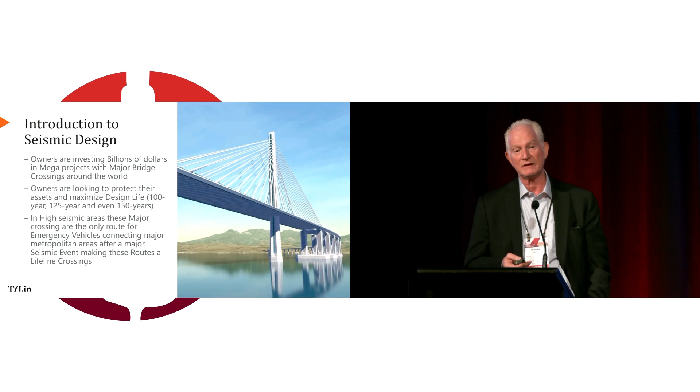So the first thing related to this particular conference is obviously the seismic hazards and the ground motions. And any big structure, you're not just dealing with seismic. You all know that, right? We saw what happened with the Key Bridge in the US when a vessel hit it and collapsed it very quickly. And any one of us in this room would have probably been able to predict that. We actually look at that pier and say it's a matchstick standing in front of a big barge. There's no way that it is going to be okay. In fact, as we speak, the NTSB in the US published a report, and we have about 17 or 18 of our mega bridges, including Golden Gate Bridge, including Brooklyn Bridge, that are actually susceptible to vessel collision, and we are looking into reinforcing those and making sure they're protected for that.

So vessel collision is one. The other one is wind. We all know about wind. We've seen some structures collapse in the past, but again, it is one of the major elements. Tsunamis is a third one. And obviously, seismic hazard, which causes tsunamis, is the subject of this topic, and it's probably the most wild one of all of them because not really a lot of probability goes into it.

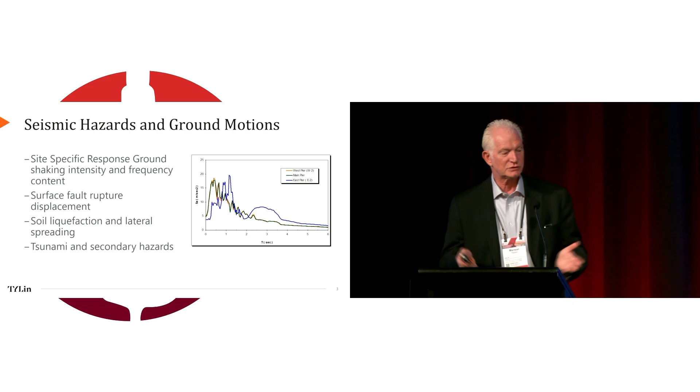So the first thing you do is you try to get your hands on what is the seismic hazard. What does that mean? It's very well represented in a response spectrum. Where is your energy in, at what frequency? It's very easy to shake a table. Are you shaking it very fast or are you shaking it slowly? Those are things that matter.

And then two, what is the soil underneath that? Is it sitting on rock, or is it sitting in a bowl of jello that shakes, or is it going to liquefy? Those are things that are major, major drivers.

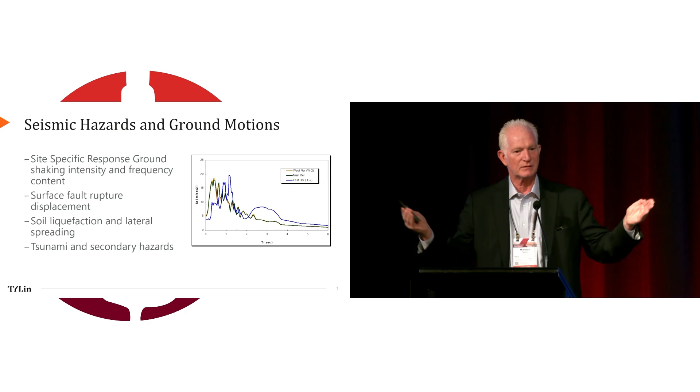The most important piece of it all is when you're dealing with a long span structure, you could be shaking like this on one pier and like that on another pier. And that's why most of our bridges collapse. That's why what happened in Myanmar, some of those projects, when you look at them, the multiple spans, you saw some trusses fall down, the others didn't. That's because simply the displacement exceeded the bearing displacement, and it fell over. The structure would have been perfectly fine if the engineer just had a little extra, probably. Yes, it probably would have got damaged, but potentially not collapsed into the water.

So what we do is we look at performance-based seismic design. What we are doing is we are looking at what is it that we want out of our structure. Are we looking for our structure to not collapse? Are we looking at our structure to save lives? Are we looking at our structure to have the ability to have emergency traffic on it? In other words, is it what we are referring to these days as a lifeline structure?

Is it a route that is very important, that after a major earthquake, when your fires are out, your buildings are down, and you need your emergency personnel to travel from one point to another, this is your lifeline structure. That's the structure you want to stay there. So therefore, it has a higher standard of performance. Those are different levels of performance, and they actually drive a lot of the discussions.

What's interesting, I've been in many conferences where people start talking about, oh, what's your maximum credible earthquake? Are you designing for the maximum credible earthquake? Or what is your return period? Is it 2,500 versus 1,500? Oh my God, you're designing for 1,500, therefore your bridge is no good. It's absolute nonsense. What matters is what are you designing and how are you going about it?

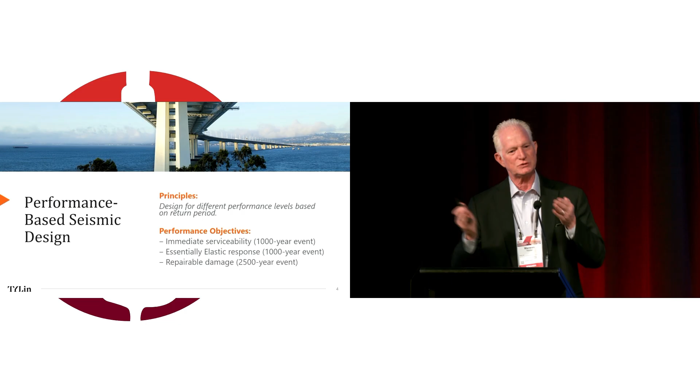Are you doing pushovers after that? What happens when the loads do exceed those demands? And is the structure going to be okay? So looking at it from a macro picture about performance-based design and the levels that you're designing for is really where the rubber hits the road.

So when we look at the design, the performance-based, and once we get there, now we look at what does it mean to have a capacity-based design philosophy? It's simple. We all drive our cars. We all know that we get into an accident. It's inevitable. It's what's going to happen.

So what you do is you design for fenders to take most of the damage. And then you design for a seat belt, obviously, to hold the driver. You have the airbag. But bottom line, you're planning for this to happen and making sure that the car system at the end of it is not going to basically break apart at the axles itself.

You're trying to have a sequential way of damaging things. And in earthquake engineering, if you actually work with a capacity-based design method, you have these weak links, you might call them fuses, like the fuse box in your house, when an electric jolt comes in and it burns up rather than having you replace your refrigerator. Those elements become the key components of you being able to design. It could be a plastic hinge design that you have. But most importantly, you have to ask yourself, what if things do change? What does that mean? And more important after that is, if they do form a hinge, can you repair it? Can you inspect it?

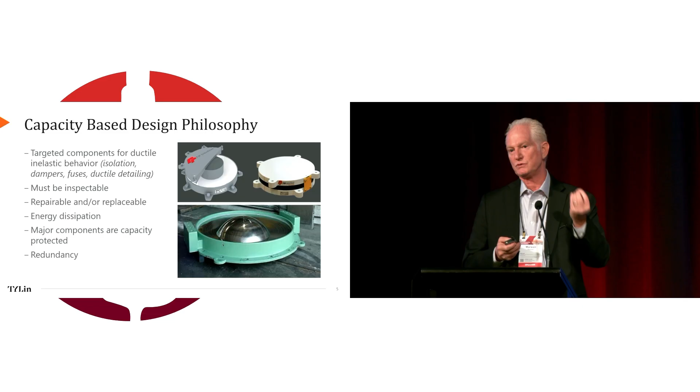Can you look for what happens next so that you are in a position where you can have the performance-based design that you're looking for? So in seismic engineering, that's the capacity design. The second is really to use our technology today to actually be able to capture the demands.

Now we've established the seismic hazard, we've designed our capacity design philosophy. How do we go about establishing the actual demands? That's not a straightforward process. However, I think a lot of us in this room would say we know how to do this. Problem is, it's too dangerous of a tool in the hands of young kids that run these analyses, and guess what? They look damn impressive.

And when you have them, you will believe them, and therefore you'll design for them. But the key is to actually always go back to the basics. The structures are rather simple. You don't want to overcomplicate it, and when you think about it, you can probably, within a month or two, figure out what the demands are.

So as I always say it, you can go and run the analysis all you want. What matters to me at the end of it is you can show me your force diagram and the force flow, and convince me that you've got the right displacements. And we look back at the response spectra, we can draw the displacement spectra and find out what the maximum displacement is so that your structure is designed for that maximum displacement.

I don't care if your time history says you're gonna be displacing about half a meter. What matters to me, if your displacement spectra at that period you have says you're gonna reach 0.75, you'd better design for 0.75. It's very simple. Your ground motion content, the time history, happens to be such that it's seeded, that it doesn't have that, it's not doing its job to make that displacement be at 0.75.

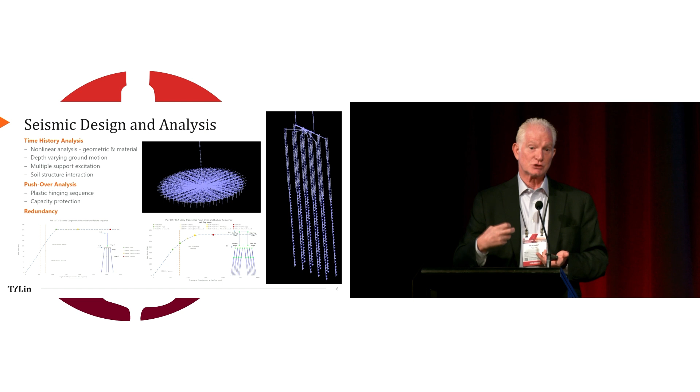But what you see in this image here is you see the whole piling system, and you see all the PY and TZ springs, and you see the nonlinear behavior of those elements. And that allows you to not only get the actual ground motions that's seeded from the bedrock, but do the depth varying motions and the multiple support excitation that I talked about, when one pier is shaken that way and the other one is shaken that way. You do that, you get a lot better sense of the complex nature of how the structure is going to perform during an earthquake.

So I am going to walk you through two projects that are dear to my heart. One of them was something that I started in the early 2000s and opened to traffic in 2013. I'll tell you, I have another story at the bar if you want as to why it took that long, but it's not by engineering, I can tell you that. A lot of politics involved.

But the key is that it started in 2000, and at that time, the whole concept of what I just talked to you about was just coming into the actual practice world that we had. There was a lot of research being done at UC Berkeley, a lot of research done at UC San Diego, in New Zealand here, across the world, learning from lessons as well, but it wasn't really taking into the actual application of building and designing bridges.

The concept of putting a damper on a bridge, or a viscous damper, or an isolation piece, base isolation, or putting a fuse was something that owners didn't want to deal with. So there was a lot of brain power that got involved in this. If I start the list of telling you the people that were involved, I wouldn't finish today. There was about 30 scholars that were all involved in performance of this bridge that you see there.

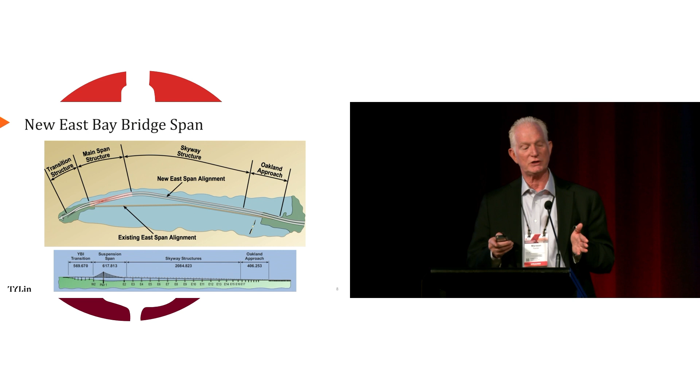So the bridge itself is about 3 kilometers long, has a signature span, which is the self-anchored suspension bridge, and has a viaduct for the other 2 kilometers.

It sits right between the Hayward Fault and the San Andreas Fault. The San Andreas Fault, for those of us who like the history of earthquakes, the 1906 earthquake in San Francisco destroyed the city practically. It was about an 8.1 magnitude earthquake, and if you look at how close it is to the city, running across the Pacific north-south, it is dangerously close to the near-fault effects.

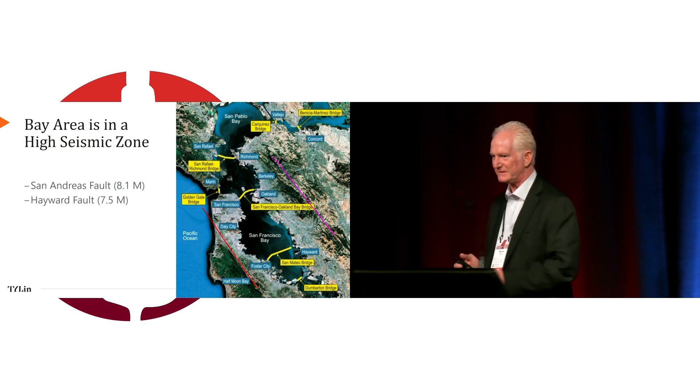I still remember as a student when Professor Bertero grabbed the table in the room and said, you know what an earthquake near the fault does versus not? If it's far away, it shakes the table back and forth like that, but if it's next to you, it takes that table and barges it. He said, that's what a near-fault earthquake does. That's exactly what it does—it actually shoves you to the left or to the right, and that's what collapses bridges.

Those kinds of earthquakes are going to occur in that Bay Area, and that's a metropolis. To make it worse, Hayward is right next to it in the hills over there. So we're sandwiched between two active faults—that definitely talks about hazard and seismic hazard. It is there, and the soil profile is terrible over there.

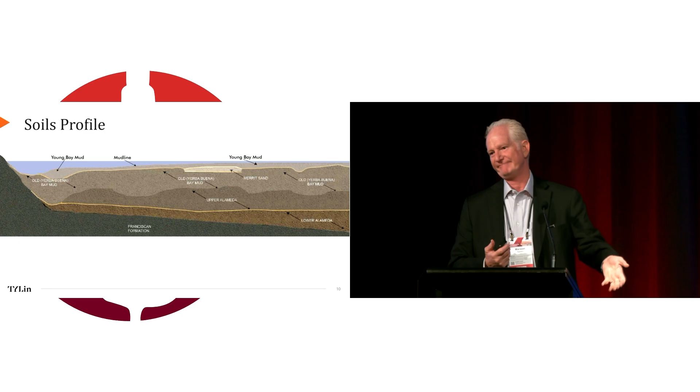A 100 meter deep bowl of jello—Bay mud, it has a name for it. When we were driving these large diameter piles into the soil to reach the rock, 100 meters deep, because that's what we needed to do, the piles for the first 30 meters sunk by themselves. You did not really need to drive them down. So the first 30 meters is just passive and doing nothing for you on these soils.

At that time, we worked with Fugro, who was the leading edge in marine geotechnical investigations. They did a 3-dimensional survey of the whole bridge, geophysical, with boreholes, and we understood the whole soil profile underneath it. In fact, the alignment of the bridge itself was chosen so that it is not as north as it should be, because they wanted sweeping views of San Francisco as you're driving towards it, and because we were afraid we'd reach an area with actual soil instability.

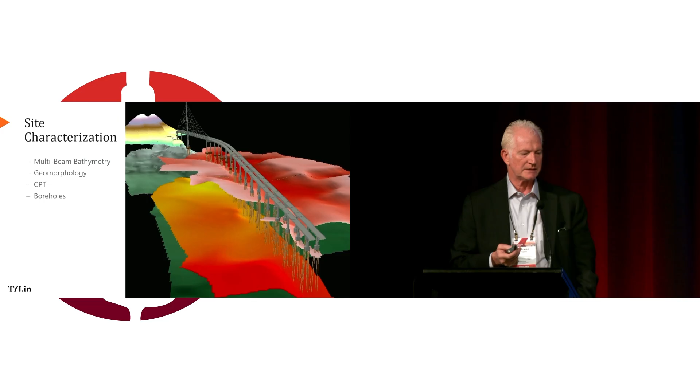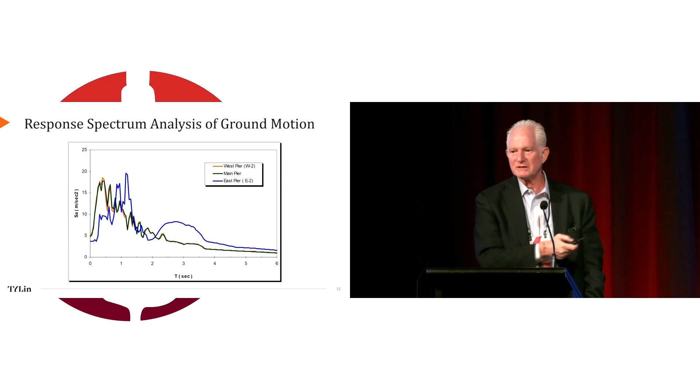Now, the seismic performance criteria—one of the things that happened, which was very interesting, is that back then, most design codes, AASHTO, any code you design for, the design life of a structure is 75 years. That sounds odd, right? You put something out and tell the owner that in 75 years you probably have to replace the bridge or do something about it. What are you talking about, 75 years? No, my bridge or my building is going to last a lot longer.

So there are two terms now: design life and service life. The idea with service life is that if you keep servicing it, it lasts longer.

A perfect example is the Golden Gate Bridge, built in the 1930s. For those who watch Star Trek, when the spaceship Enterprise came into San Francisco in year 3000, the whole cityscape was different, except the Golden Gate was still there. That gives you a perspective of how much people like their bridges.

But what does 150 years mean? Is it better than 125? What does it really mean? Forgetting service life for a second, the design life simply means you design for a 10% probability of exceedance over the design life.

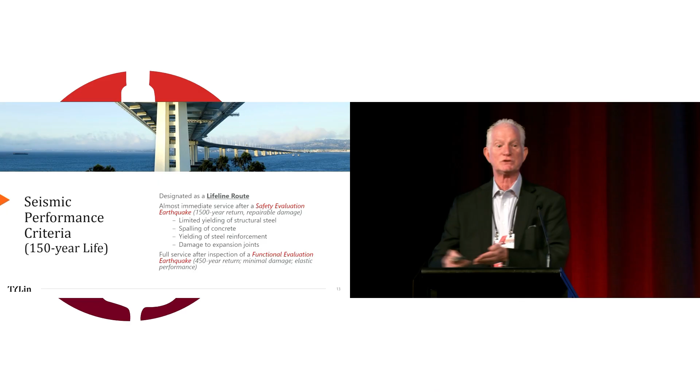So everything is changing when it comes to maximum earthquakes, maximum wind loads, vessel collision - all of these pieces, because they're probability based, and therefore your maximum loads are increasing. That's primarily what it's doing.

Now with durability, you're working towards a program that also gives you the 150 years. What that means is the onset of corrosion cannot start before 150 years. Now, if you paint your car quite a bit, it lasts longer - so obviously maintenance and operations has a lot to do with how long your structure lasts.

But the key with this 150-year design life when it comes back to earthquakes is what it does for our performance-based design. Do we design for a safety evaluation earthquake at that time, or a functional evaluation earthquake? People started asking what that means, and we landed at a 450-year return period for a functional earthquake, and 1,500 years for a safety evaluation earthquake, coming up with criteria associated with both.

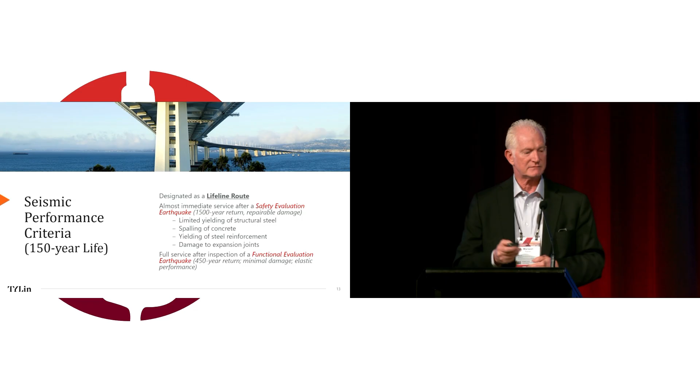Now, the design philosophy was a limited ductility structure, primarily because the structure was a lifeline structure. It was not going to sustain damage such that after a major event, within a day, you could have emergency vehicles on the bridge. That practically trumped everything else.

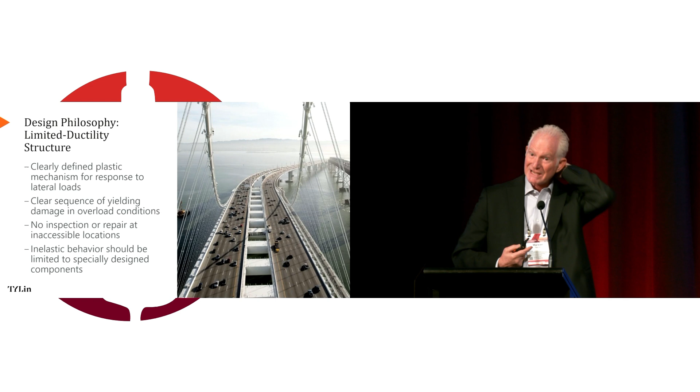For the functional earthquake we practically designed the structure for functional performance at the safety evaluation earthquake level. However, we did not want to design for the very large event. So we started thinking about what to do to design the bridge for an earthquake so that we could use some of that seismic ductility, some of those seismic performance fuses we had. I was lucky enough that when I was doing my research at UC Berkeley, Igor Popov was testing shear links at that time.

Those shear link tests were for building eccentric braced frames, and I remember seeing how they behaved. So I called up Popov and said, this is what we have - I'm thinking of putting shear links along the height of the tower. Would you think that's a great idea? I couldn't leave the TYLin offices for about 6 months after that - he was so happy about it.

We ultimately devised a research program and tested it with Frieder Seible at UC San Diego. But the idea is simple: you design a single tower split into 4 shafts, with links along the height like a ladder. Those elements are designed so that they yield during an earthquake, so that the actual shafts are not damaged at all.

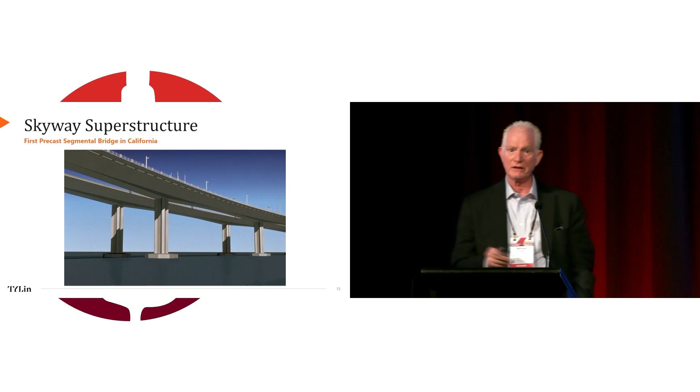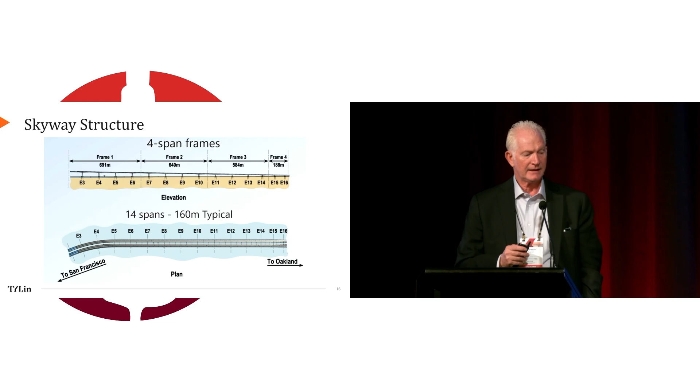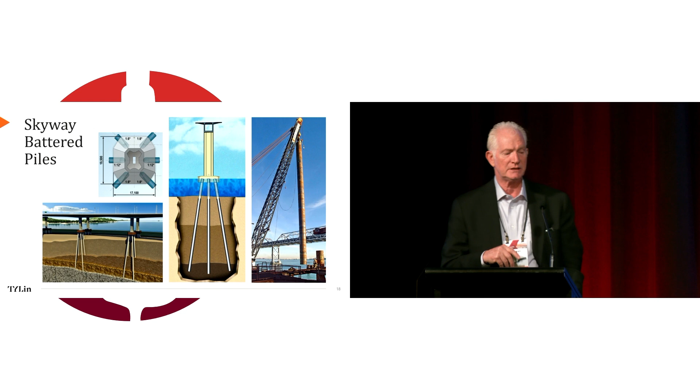The key to the performance of the skyway, as we call it, was simple: you batter the piles so that you don't have a lot of displacement into your pile cap, and then everything is, for all practical purposes, essentially elastic - you're taking the brunt of the earthquake. The benefit is you have a long period structure, and that carried up to the superstructure.

Between the frames, we designed fused beams. These fused beams are designed so that in an event of overload, they are the elements that will actually yield. That's key here - we are not designing the pipe beams to fuse during a major event like a safety evaluation earthquake. We're not.

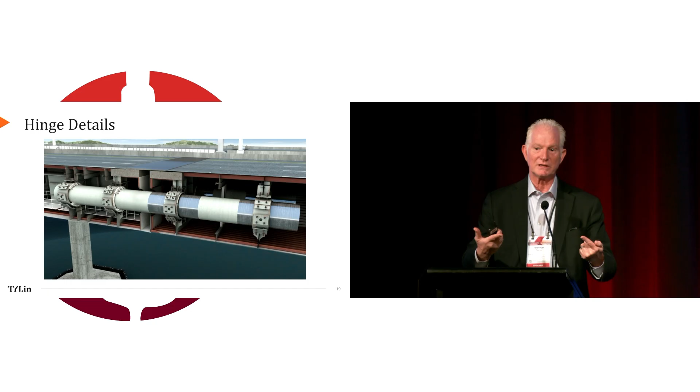But in the event that loads are more than what we expect, this is the fuse that we are designing for. Now, back to the self-anchored suspension bridge, a very unique structure.

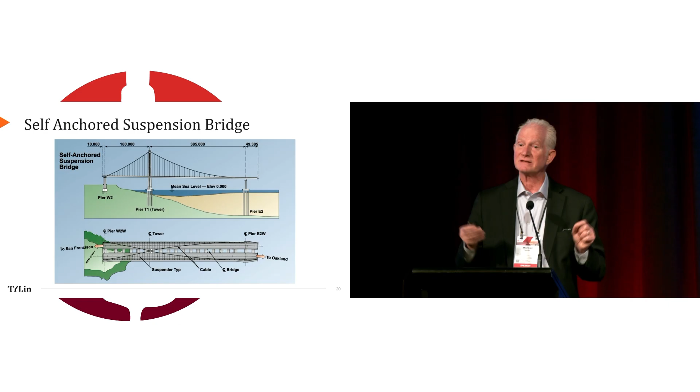The cable, instead of anchoring into the ground, is actually anchoring into the deck itself. The cable itself is 3-dimensional. And to build the bridge, you have to build it on false work, because it's not capable of carrying its load during construction.

The main span is 385 meters, making it the longest self-anchored suspension bridge in the world. On top of it, it's not symmetric. So if you have plastic hinging in the piers, there is a tendency for the bridge to tip to one side, from east to west, and that's not a good thing. So we designed a counterweight over the west pier where it sits over rock, intended to make it basically symmetric over that single tower.

The next image shows you the cable in 3 dimensions. Most suspension bridges in the world do not have 3-dimensional cables. In fact, just building a 3-dimensional cable is a science in itself. These cables are basically taking the catenary action in both directions, vertical and transverse, and that's why you see that parabolic shape on both sides.

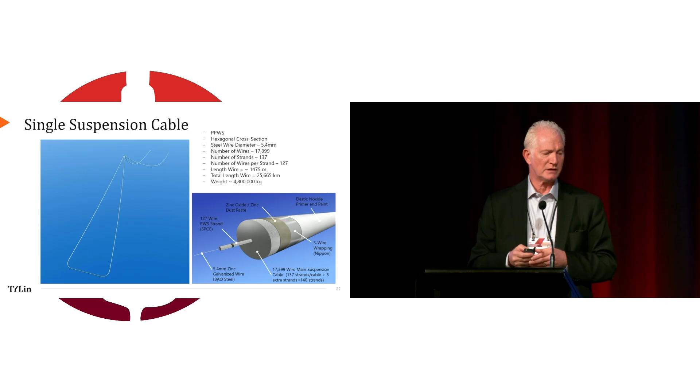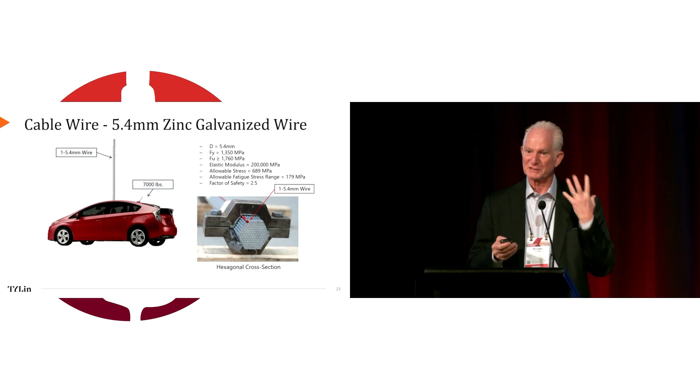This cable was designed with prefabricated wire strands, high-strength rods. The key is that each one of these 5.4 millimeter zinc wires can hold practically a Toyota Prius. It's a very strong wire. I just wanted to give an image because sometimes we think, okay, what's a cable really doing? It's carrying the whole bridge.

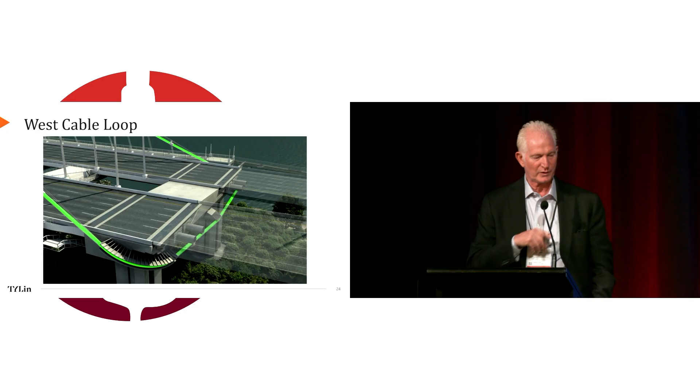Some of the dimensions or details we have, which have very little to do with earthquakes, was a first-of-its-kind looped cable around the west anchorage, so we can have the cable start at one end, go over the tower, loop around, and come back. A lot of new technology was developed for this bridge. On the other side, it anchors into the east anchorage, where the cable splays out.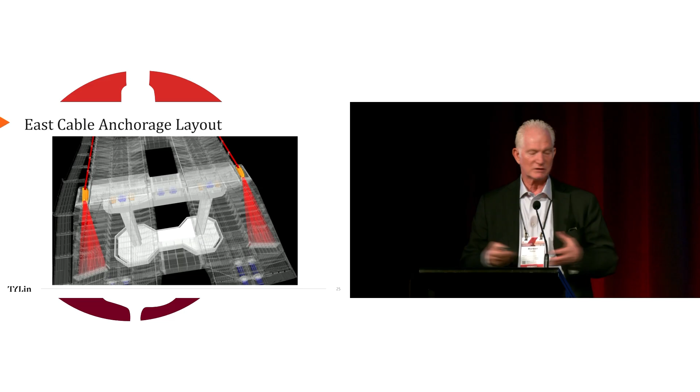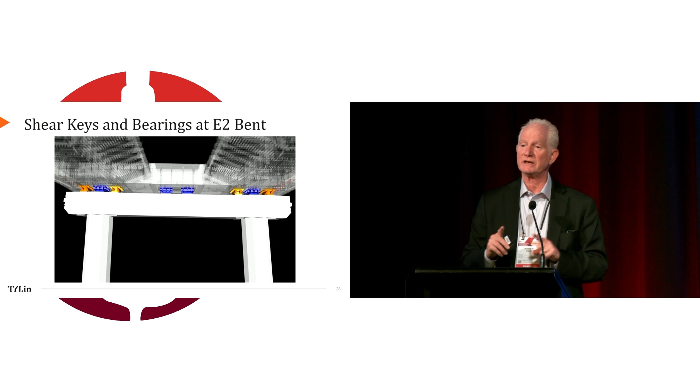The key is the components. I talked a little about potential failure of elements on the actual piers. In this case, you see some colored elements: the blue are the shear keys, the yellow is the bearings, and the key is to have redundancy. The blue is carrying all the shear, the shear key, and carries no vertical load. But if the shear keys were ever to fail, the bearings had gaps in them, since the bearings carry vertical load only, so they would displace about 10 millimeters, and after that they can carry the load themselves.

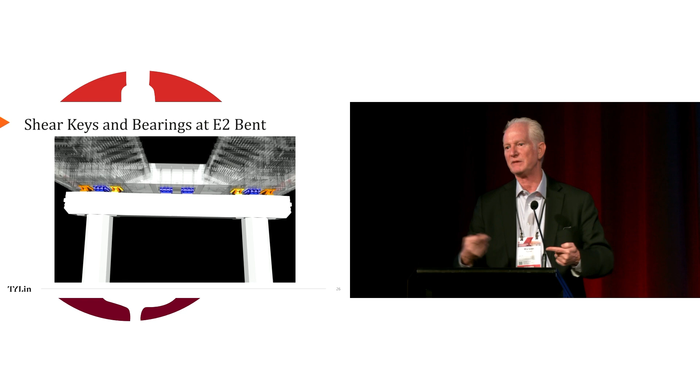So again, you're always thinking, what would happen if something does fail, and is it going to be okay, or does that mean the bridge is going to get into a problem?

Back to the tower. It's a steel tower, stiffened box girders, practically, that are designed to have the ability to have a good plateau in compression for them to be a very compact section.

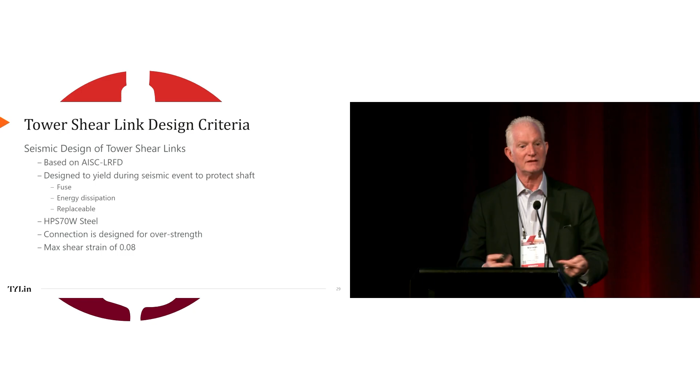The white elements you see are the shear links. The shear links had a whole science to them, but the most important element is that the actual webs of the shear links were designed specifically with a steel type that had a maximum limit on the ultimate strength of the steel. Why? Because we want to make sure it is an actual fuse, not that stronger is better in this case. In fact, stronger is worse. We want to make sure these things do not have overstrength so they don't subject the vertical towers to more load.

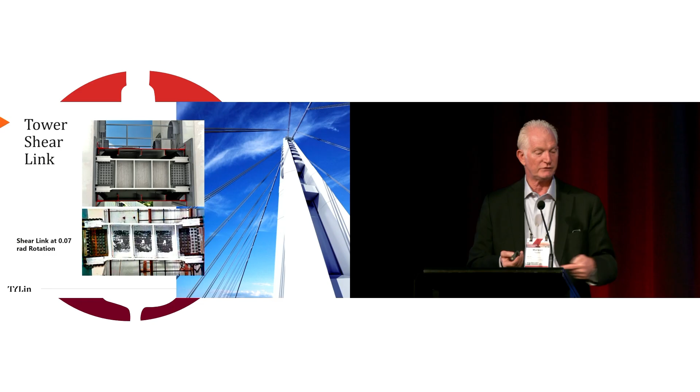The tower shear link itself, you see it here. The image on top is a rendering, and the image at the bottom is actually the tested component at UC San Diego. We also tested those at University of Nevada, Reno, and you see an animation where the areas turning orange is where the yielding is. Everything else remaining in blue is basically elastic.

The box girders are orthotropic deck box girders, closed sections.

Just because of the seismic criteria, the orthotropic design became a big anomaly. Usually you want these to be thin-plated structures, but Caltrans wanted extra capacity for the 'what if' scenario - we know the box girders are designed to remain elastic, but what if overload happens? Does that mean my box girders are going to buckle? So we designed them to be compact, to take that extra strain, about 2 times yield, before you have real problems. So the orthotropic ribs were thicker than the typical orthotropic rib you see on a suspension bridge.

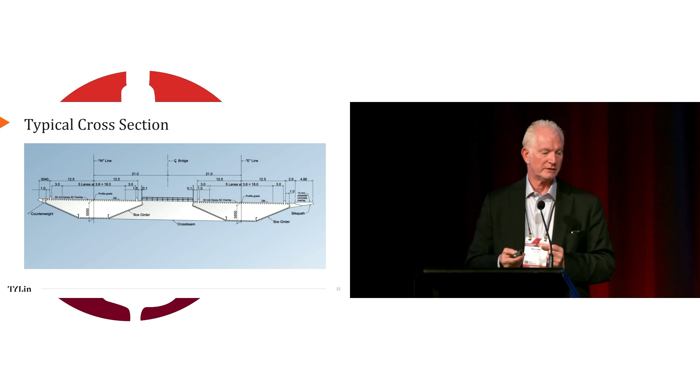Now, I talked about the global analysis. I won't go into too much detail, but basically we ran it in ADINA at the time. Remember, we're in 2000, 25 years ago, believe it or not. That run I show you here would take about 4 days before we got results. This was how big the models were and how little our CPUs were at that time. So it was a very big investment - we run it and we wait, and then we get it.

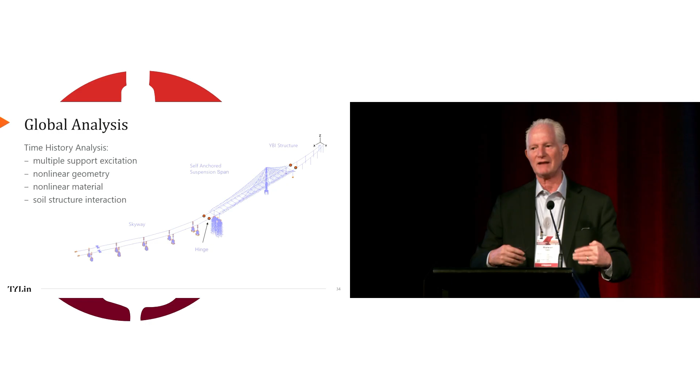And then the problem was we get so much data - post-processes with standard software did not exist. So you had to go in and do the post-processing yourself. It can be overwhelming in its own self.

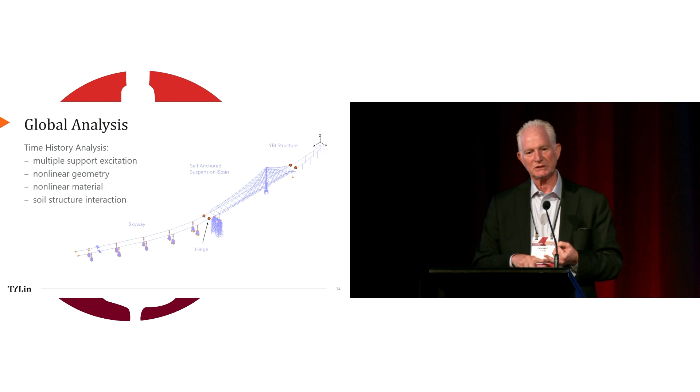Bottom line, the multi-support excitation, the depth varying motion, all the ground motions were pumped into p-y, t-z springs, and from that we get back to the maximum displacements I talked about. So we did all those runs, came back to my response spectrum, looked at my mode shapes, and found out what the displacements were, and whether they make sense and are consistent with response spectrum analysis. Sure enough, most of the time it was.

Second, we looked at where my damage was actually occurring. We found out that yes, it is occurring in the shear links, in the east and west piers, exactly where we want them.

And what is the level of damage? You can see the middle image - focus on the bottom middle image, which shows the pushover of the tower. That vertical line is where the actual displacement, that 1.0 or 1.3 meters top of tower displacement, is. But look what the tower can do beyond that - the tower is not going anywhere. So that gives you a lot of comfort knowing that the shear links are working, your vertical shafts are working, and everything is going to be robust.

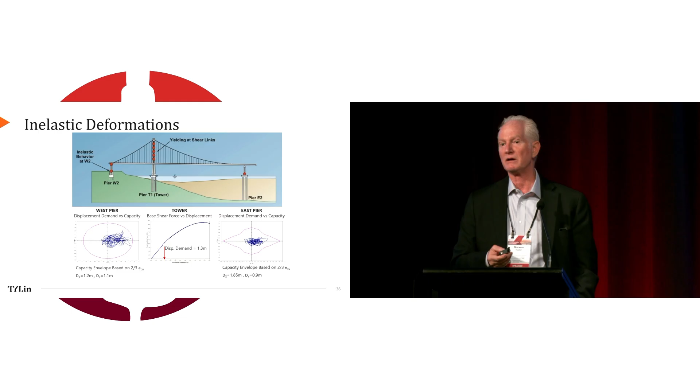Again, the images on the left and right show that the actual time history is all within the envelope of the east and west piers. Very little yielding going on as far as these elements are concerned.

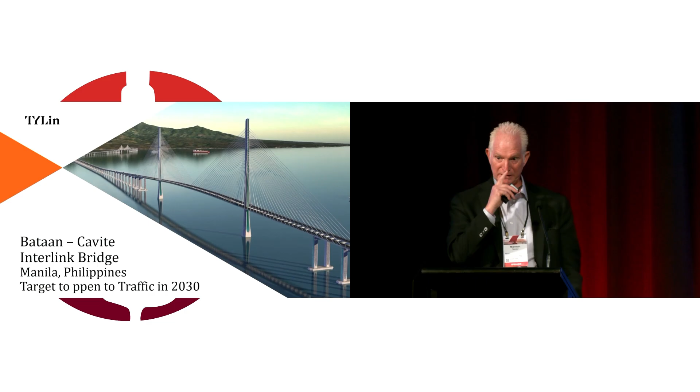Now we go to something happening as we speak. We move across the Pacific towards the Philippines, very close to where you are. This is a project we've been working on recently, the Bataan-Cavite Interlink Bridge, targeted to open to traffic in 2030. It's a major bridge that crosses the Manila Bay. Anybody familiar with Manila Bay, it's on the top - don't look at the lake, the body of water above it. You can see Corregidor Island there, a famous World War island that was very instrumental.

The bridge is going to cross the mouth of Manila Bay, 32 kilometers in total. It has two major navigational channels because the port of Manila is inside. It's going to create a completely different area for Manila to grow into, the Bataan side. The Bataan side is undeveloped, the Cavite side is completely developed and overcrowded. If you've been there, 3 kilometers will take an hour to drive from one side to another. So this bridge will provide a route to an undeveloped area, and if done right, it can provide a lot of growth for that area.

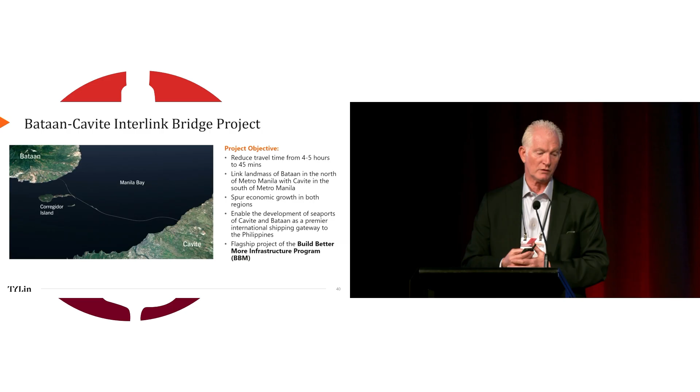It's part of the Build Better More program, and it's very much supported by the community there, all of Philippines, and most importantly, it's funded by the Asian Development Bank.

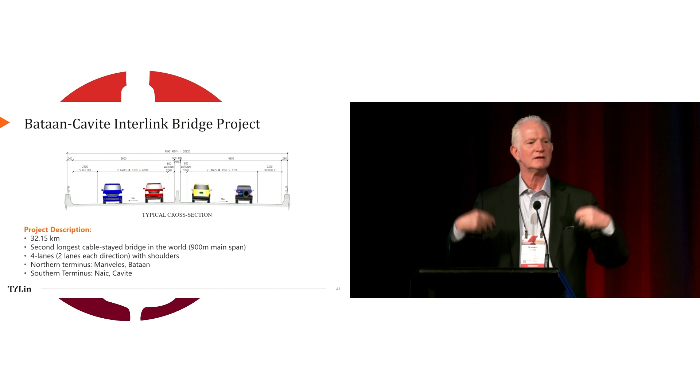We won that project just before COVID hit. So we were all planning to move and travel and go back, and COVID hit, so we learned to work with teams, to work with the client towards developing the project and how we go about it. 2 lanes in each direction with a shoulder, but I can tell you, anybody that goes to Manila knows this is going to be a 6-lane bridge because they drive on every single inch of pavement that you can find.

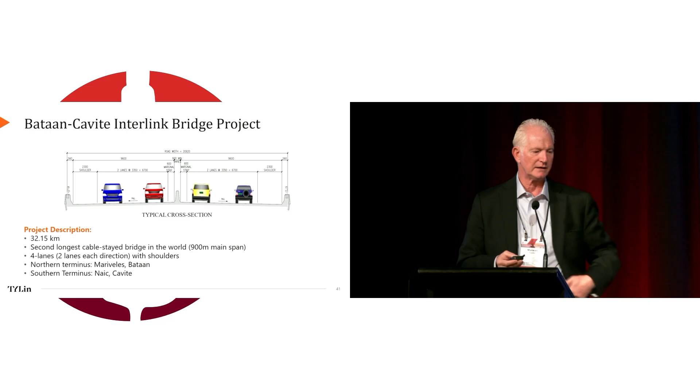So the highlights of it are that it's a 100-year design life. It took a lot to move them from 75 to 100, just that simple movement of making them understand the value of it. Obviously it impacted the vessel collision design, it impacted the wind, as I mentioned, the tsunamis - you name it, they have all of that in Manila. And obviously earthquakes are huge in that area.

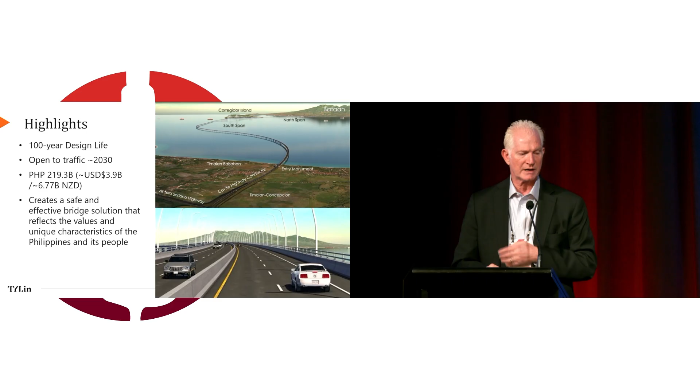The bridge itself is mostly a marine viaduct, but it sits in very deep water. Unlike the Bay Bridge, which sat in shallow water with a deepest part of about 15-20 meters, the deepest section here is about 60 meters deep.

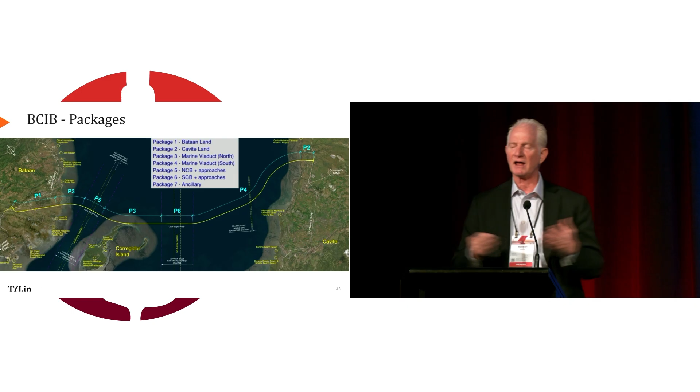The project is divided into 7 packages, really 6 packages. The last package is to pave it and make sure the whole bridge looks consistent. Two of the packages are on either side of Corregidor Island.

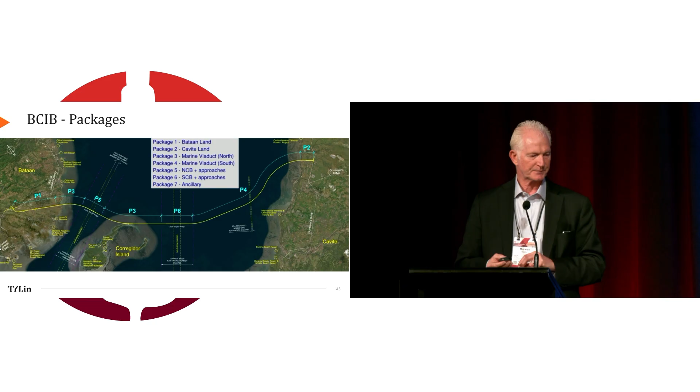The crown jewel is the cable stay bridge, the South Channel Bridge, with a 900-meter main span and two towers. You can see the ships that pass through, huge ships, so vessel collision is a big deal here for us.

Just about when we were approving this, the FSK bridge collapse happened, and I had to go to the secretary to show them what we're doing to convince them. All they wanted to know is that if a huge vessel hits the tower, nothing happens. Well, something is going to happen, but the bridge is not going to collapse. So we had to walk them through all of that to convince them.

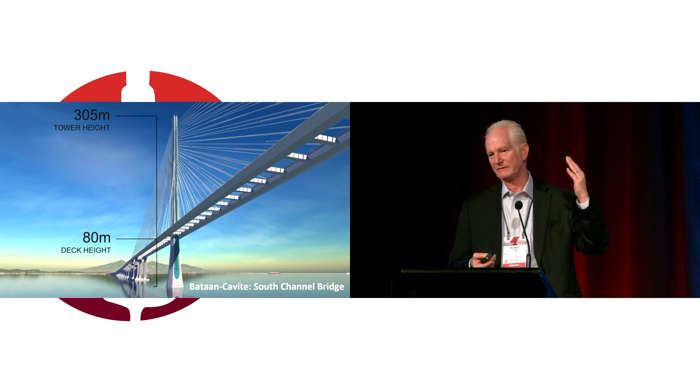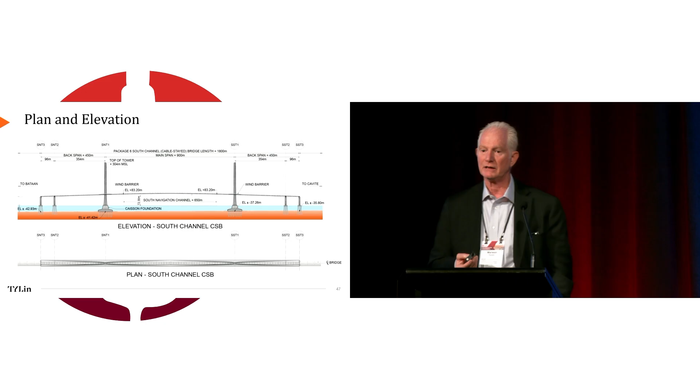Here's a plan and elevation of the bridge. You can see that the backspan has two anchor piers, which help with uplift on the backspans.

Similarly, on the other side, the North Channel Bridge is a smaller version of the South Channel Bridge, about 400 meters in total length but very similar in layout and spans. This shows a rendering of the marine viaduct. Most of its spans are 60 meters, built as heavy lifts span by span, and in some other areas they go up to 100 meters.

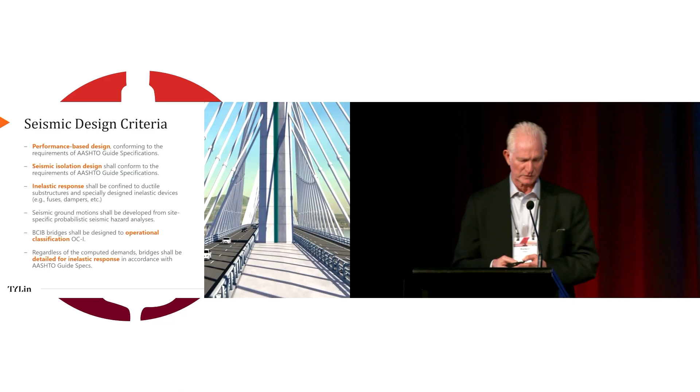The seismic criteria on the bridge are nothing different than what we typically deal with. You look at the standard codes, evaluate them, and decide on the master design criteria, then develop the seismic hazard. We had 3 different levels of earthquake that we designed for, working with local and international codes to develop a performance criteria specific to this bridge.

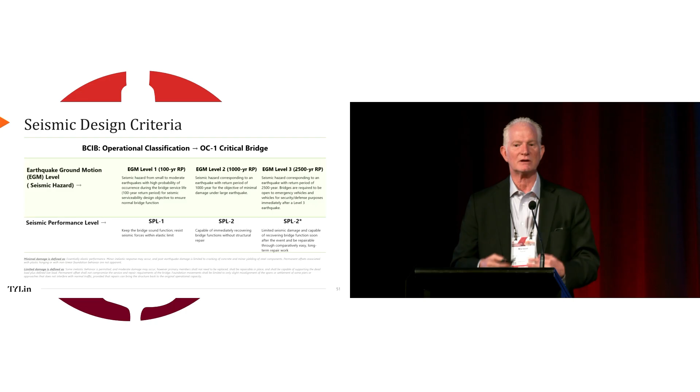The most interesting case is the 2,500-year return period and its performance requirements. In a nutshell, in both of these projects the main criteria was to protect the asset. People often ask me if the San Francisco-Oakland Bay Bridge is designed to be better or safer than the Bataan-Cavite bridge, and the answer is they're very close to one another. The difference is that this one is not designated as a lifeline structure, but it still has a very important criteria limiting the amount of yielding that occurs. So there wasn't much need for fuses on this structure, as much as increasing the damping so the structure isn't subjected to larger loads unnecessarily.

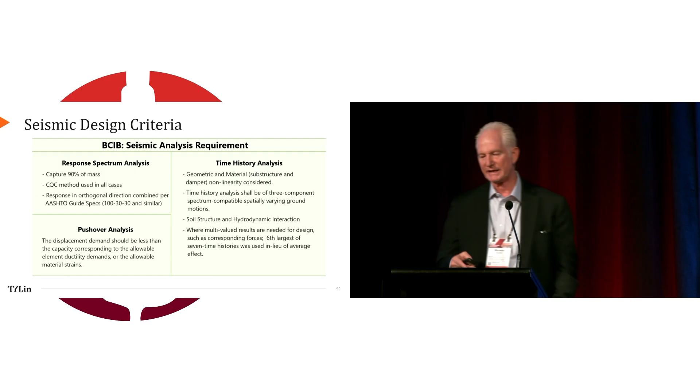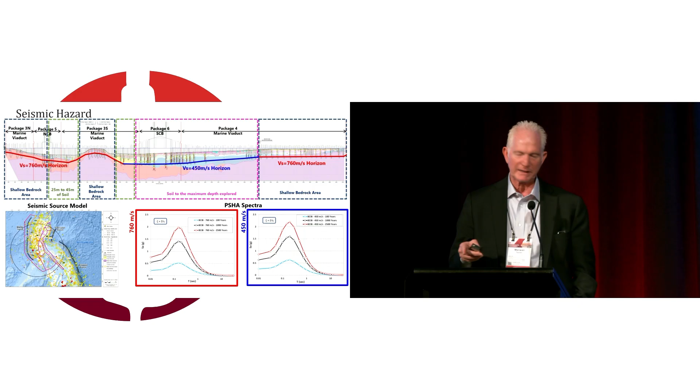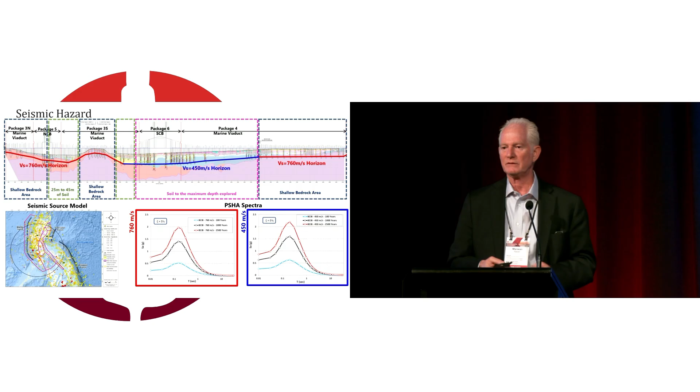For the seismic criteria analysis requirements, we did time history analysis, pushover analysis, all the standard work. The site sits between two major faults, not too far from where the bridge crosses. A very comprehensive geotechnical campaign was done to understand the soils and develop the spectra. We had 2 different spectra along the length of the bridge because the rock looked very different in one area versus another, and we ran 7 ground motions developed specifically for that.

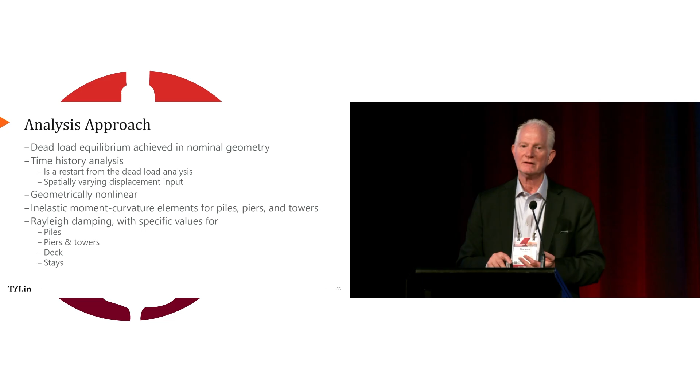So again, the analysis approach was very similar. We designed for multiple support excitation, ran depth-varying motion, and accounted for liquefaction. There is a lot of liquefaction that occurs in that area, so we did all of that. And when we evaluated where we would have any damage on the bridge, we quickly recognized that we would like to use seismic devices to help us with the design.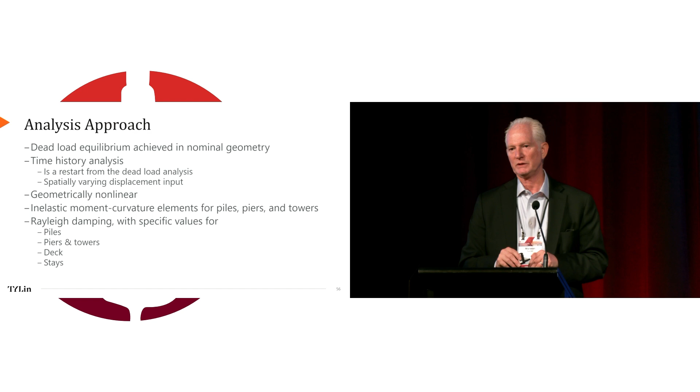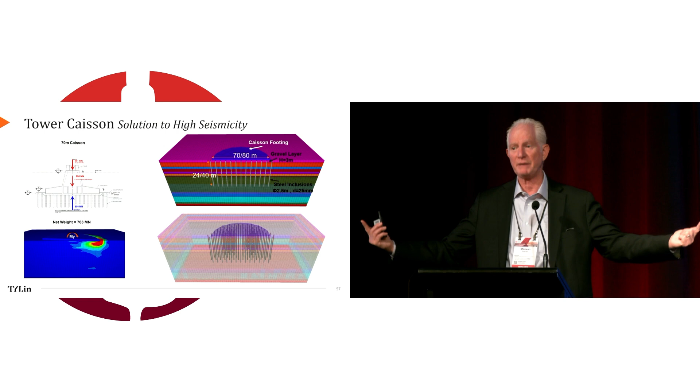Now, one thing which is very unique here is we looked at the foundations of these big caissons under the tower. The tower is very tall, and we could design it with piling that goes into it. But like the Rion Bridge in Greece, which some of you may be familiar with, we actually contemplated having an isolation under the big caisson. The caisson is 100 meters in diameter - it's a big football field. That's how huge the caisson is.

So we actually decided to drive inclusion piles into the actual soil to improve the performance of the soil bed, dig out the area so we have a gravel bed above that, and then lay the caisson on it. After that, you'd build your caisson on top of it and then build the tower on top of that. So what you're practically doing is isolating your caisson from the ground underneath it.

So that's an image of it. Again, it's very important to note that the actual piles are inclusion piles that do not connect to the caisson above it. Therefore, it's there to improve the bearing capacity of the soil underneath it - it's there not to, but to allow the caisson to move. Obviously, in this case, the caisson is so wide it does not uplift at all. So you're basically isolating the foundation of the pylon from that.

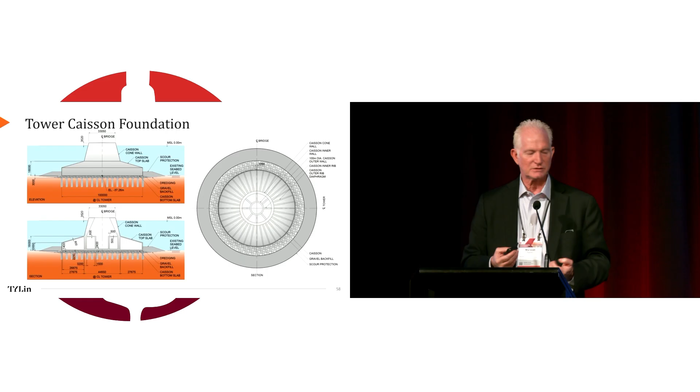By doing that, we actually reduced the seismic demands on the cable-stay bridge by 30%. It's as simple as thinking: what can you do so that rather than anchoring into the ground, you're actually isolating yourself from it. This is what shows the modeling. All the PY-TZ springs in this case are coming from that inclusion pile analysis, with the geotech giving us those parameters to put in.

We had gap elements to allow for uplift if it does happen, friction elements, and we ran all sorts of envelopes - what if the friction is this low, what if the friction is that high. And then we ran different soil springs - what if the soil spring is this low versus that high.

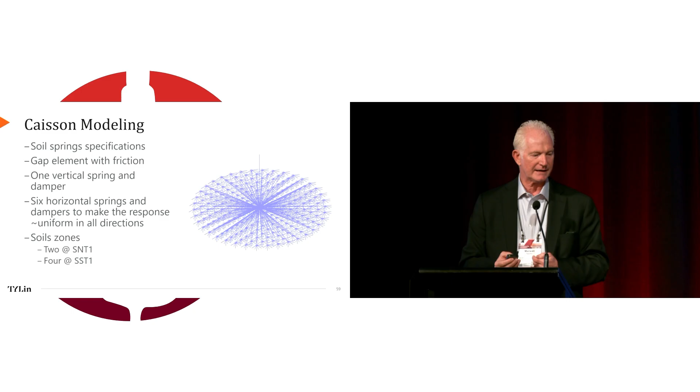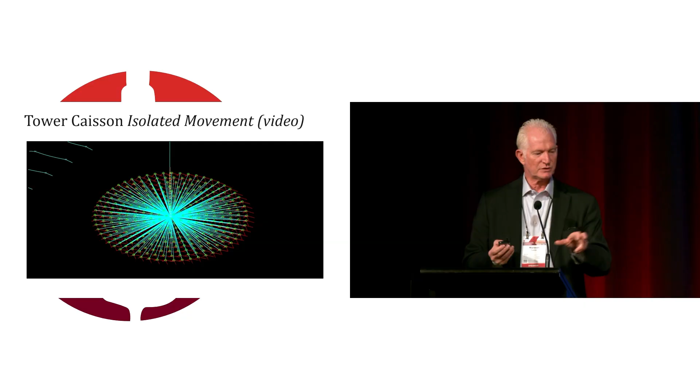And what happened here is, hopefully it moves - this shows you the actual caisson sliding back and forth. What's interesting is that it moves about a foot, or about 30 centimeters. That's a lot by any measure for a foundation to do. But when it comes back after the earthquake, and we run it back and forth, that amount comes down to about 5 to 10 centimeters of permanent displacement - nothing in a 900-meter main span of a bridge, but reducing your seismic load by 30% is quite a good deal.

Here's the plan and elevation of the bridge. Again, I draw your attention to the height of the tower - this would be the highest tower in all of Manila, so they're very excited about that.

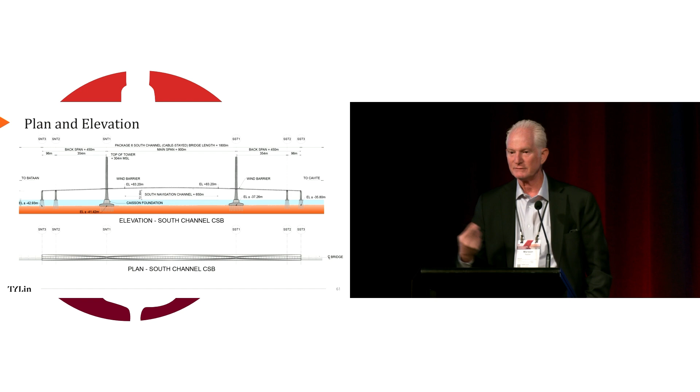It is a hollow concrete structure, reinforced and detailed for inelastic behavior, although it is going to remain elastic. That's very important - this tower's loading, thickness, and reinforcement are actually all governed by wind loading. This is typhoon country. You have a very tall tower standing there, so the loading has to be elastic, unlike seismic where you can accept some inelasticity - this one has to remain elastic. So this tower's stiffness and strength were governed by wind loading, however the detailing also had to be seismic. So that's your suspender belt system if you think about it.

Obviously, by isolating the bridge at the bottom, we made the seismic loads lower than the wind loads. If we did not do that, the seismic loads would have been larger. Make sense?

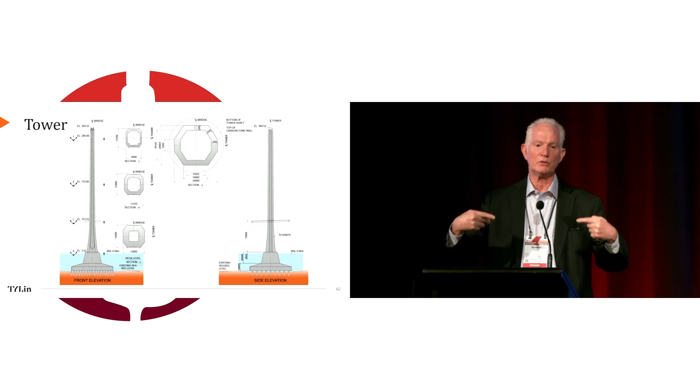So it was governed by seismic until we isolated it. Once we isolated it, wind governed the loading. That was the same story across the whole bridge. In other words, by isolating the structure, we made the seismic loading, which would have governed the whole loading of the bridge tower or marine structure, lower than the actual wind loading, which is typhoon loading coming in.

The typical deck section is an orthotropic deck cross-section. This is one area that is different than the San Francisco-Oakland Bay Bridge, because Caltrans there insisted on compact sections for the orthotropic deck. We did not believe it's necessary here. We decided we don't need to, because it's a very, very long span, and having extra weight on the deck is just extra weight that is not needed. That's the word extra.

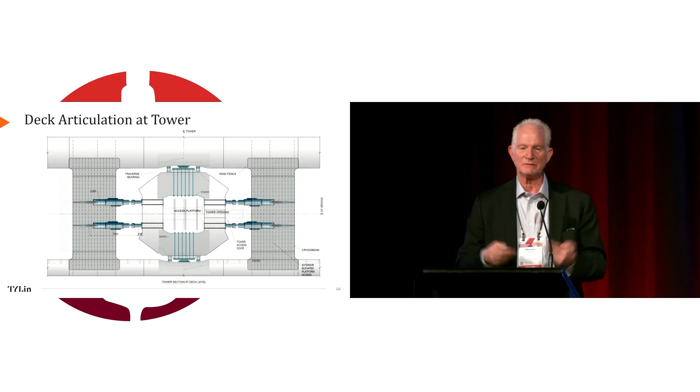These are the elements that we have, mainly for adding damping. That's primarily why they're there. Now, you might think, what if these dampers don't work? Because we all know seismic dampers would leak. You are in Manila, maintenance may not actually happen. What would happen? So we actually ran it with scenarios of one not being there at all, and another scenario of them locking up, to find out what that does. And in both cases, the bridge is okay. You just sustain local damage to the various elements, but you don't have a problem with the overall performance of the bridge.

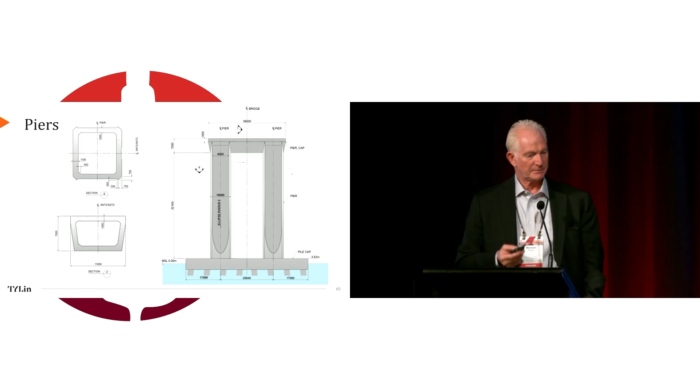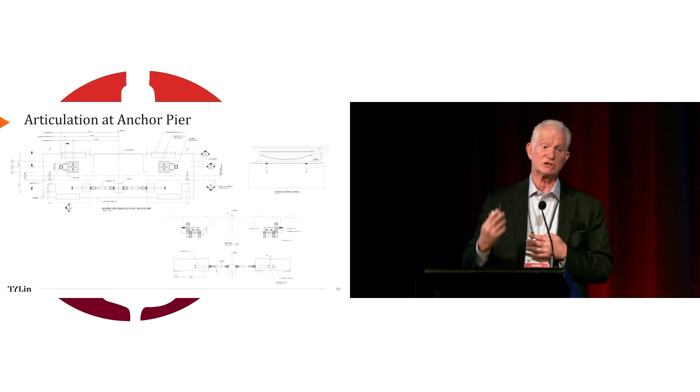The piers are also hollow sections as well. The articulation at the pier is basically that they have anchor ties at each end. They have a bearing, and they have a shear key as well on those elements. On the other side of the expansion joint where the high-level approach comes in, the high-level approach is isolated between the superstructure and the top of the bearing.

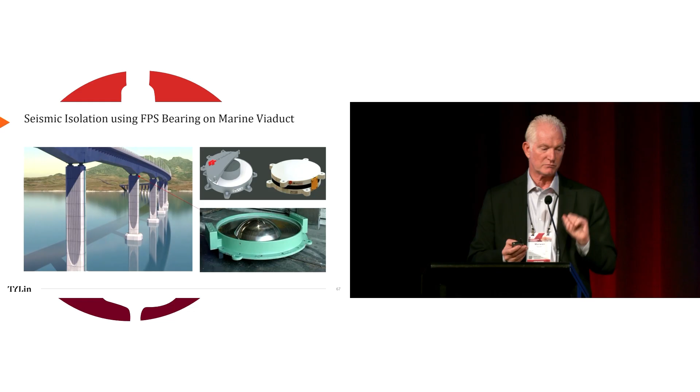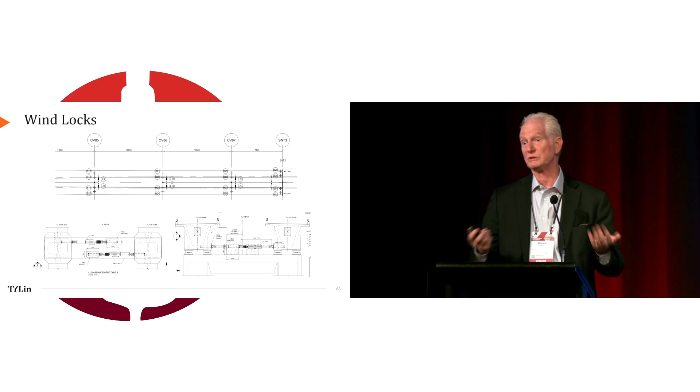The bottom image shows you the actual shock absorbers that you have there, which are actually there to resist wind loading. Once that threshold is exceeded, those break so that your isolation does actually take place. In this case, what you have is a triple friction pendulum system that is over all of the marine viaduct as well as the high-level approach. This is the image of the windlock. You have the isolation system, plus a supplemental windlock that is there to resist the wind loads. Once that is exceeded by the seismic loads, those windlocks break, and you've got the isolated structure. That's therefore the maximum load that you're designing your foundation for - the wind loading, not more than that.